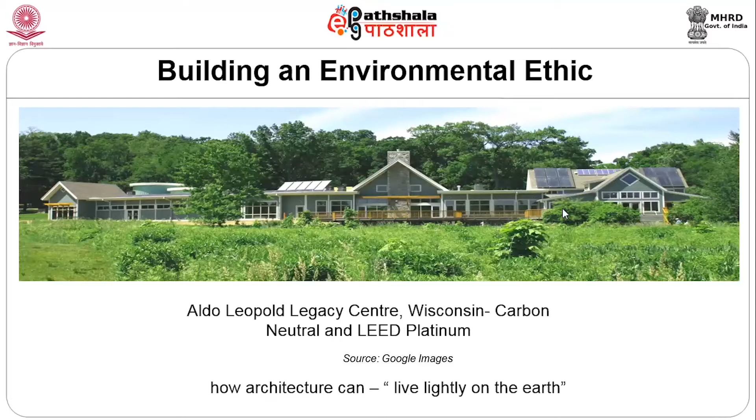When you look at the site and the correlation to the building, it is very much in cohesion, it is very much in harmony. It is not a glaring glass facade and a metal structure. The materials and the environment and the site all go hand in hand. And that is the beginning of developing an environmental ethic. So what is environmental design?

What has happened in today's context is something that is emergent: corporate architecture. According to Lewis Mumford, the modern architect has produced the most flagrantly uneconomic and uncomfortable buildings which can be inhabited only with the aid of the most expensive devices of heating as well as refrigeration. The irrationality of the system of construction is visible today in every city from New York to San Francisco. Glass sheath buildings without any contact with fresh air, sunlight or view.

This happened in the West, in the United States and Europe, much earlier than it has struck eastern countries like India. What exactly has happened is a particular frame has been created where a building has to fit in. We have forgotten the importance of site, climate and other such factors that go into architecture. We have related posh and expensive living as the primary way to live. We have forgotten that there is something called climate responsive architecture, there is something called sustainable design.

Now what has come to the current scenario is we have created a problem over the past few decades and now we are striving hard to find a solution. Till now, India and other countries of the East have always aped the West. Let it be urban renewal or any form of architecture, we have always tried to see what they have done and follow in their footsteps.

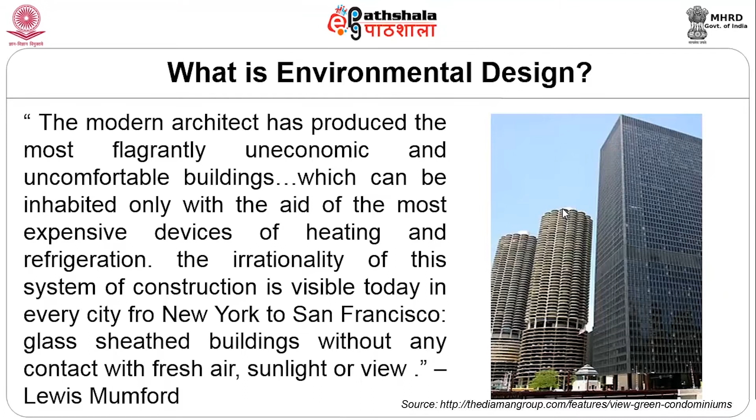And now when sustainability is the most talked about topic in countries like the United States and Europe, this is also the right time to actually look at them and decide that certain things that we have taken from them are not apt for our country, our climate and our energy scenario. If you look at environmentally sensitive design, it actually has to be harmonious. It has to be responsive to climate.

We have to make sure that our consumption of energy in terms of heating or cooling the building is minimal or negligible for that matter. So let's try using natural air, natural light, natural ventilation, natural solar characteristics so that we can minimize the consumption of energy, and the building seems to be a part of the site rather than something that's been forced upon it. So we have to make sure our dependency on non-renewable resources is very, very minimal.

And the non-renewable resources should also be considered for, and made sure that the building is giving back at the rate it is consuming. So basically, sustainable building design looks to live lightly on the earth, so there will be quality as well as resources for the generations to come.

The project over here we have is the Eden Project in the United Kingdom, where it's incorporating nature as well as innovative architectural design. This again was a very controversial topic because in spite of it being a passive design in terms of environmental design, where the energy consumption was nil and what it took from the earth was very less, the material that was used was not considered to be the primary utility because it changed the value of the building tremendously, and this building definitely does not look as if it belongs to this site. It does look as if it's been thrust upon it.

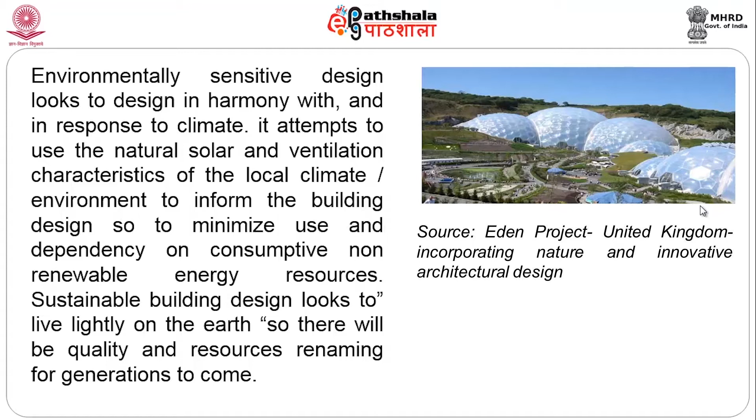So here again there are two different ways of thought. Can a design be completely passively designed with less energy consumption? At the same time, can it be flagrantly designed in terms of design? So can climate responsive architecture buildings not have a cool factor? Is that true? Not really, and the Eden Project is one such example where the architect did play around with spaces, materials and all of that, but still it proved to be a good example of a carbon neutral building.

The ethic behind sustainability. Now coming to an example within our very own country, this is the Sembra Valley in Kodaikanal. This is a resort that was developed, and this place is created, submerged and surrounded by nature, like you can see over here. The rooms are pretty much in context with the site. They are not thrust upon it, and any cutting along the hills happened in cohesion with the trees that were there. And it was very much decided that any trees that were cut down during construction were accounted for and replaced as an afforestation program side by side.

So sustainable building actually is not a new genre of architecture. Like how we have modernistic architecture, the Art Deco movement, all those are styles of architecture. But sustainable building is a basic requirement of architecture. Like how we have light, ventilation, and basic materials that are required to build a building, sustainable design is one such basic requirement that needs to be considered. It is not an option for an architect to follow, but it is a requirement for every architect to follow.

So our primary goal is to lessen the harm any poorly designed building can cause by using the best of ancient building approaches, but with a logical combination with the new technological advances. I think this is the best time to learn from history. If you look at any of our old historic buildings, all of them are considered the best examples of climate responsive architecture. How many palaces and forts have been there for centuries? They don't require fans or air conditioning, and still they are very good places to live in.

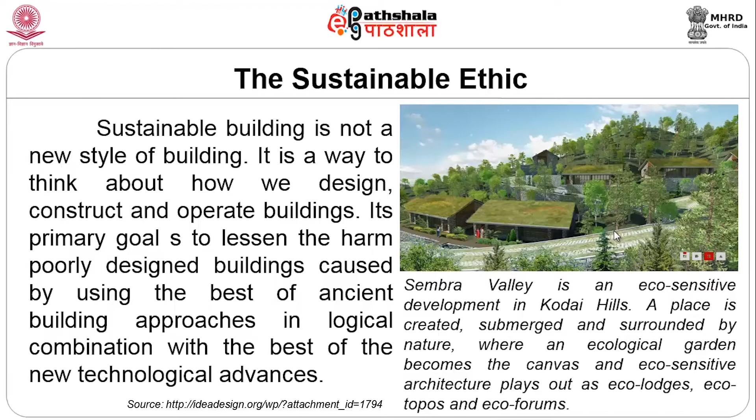This is another example of the Sembra Valley part. This is another portion of it where you can see that you do have elements of the modern era. You have the traditional paving. You do not want to have a completely muddy route and all of that. But the way it has been done, the lights are completely solar powered. It takes power throughout the day from the sunlight, and once the sun sets, it automatically triggers on. But the problem with this is it's not completely foolproof. On days that are very cloudy or rainy, it does need an external boost of energy or electricity.

But we need to have a fallback plan. A plan B is sufficient enough for the current scenario we are in. Rather than taking energy on all days when the sun is capable of giving us energy, on the certain days when it is gloomy or cloudy, we can step in and substantiate for that. But the main ultimate goal is to make offices, homes, as well as entire regions that are net producers of energy, clean water, air, healthy human life as well as biological communities. So that is the root of all ethics of sustainability.

We need to ensure these basic necessities, which have now gradually become luxuries, are restored. We actually have people selling air from New Zealand and Canada to parts of Beijing and Shanghai because the air has become so polluted.

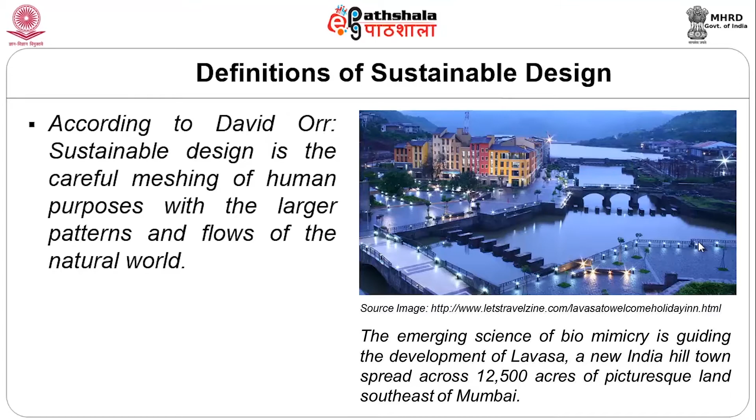If you look at Lavasa, the credentials are right about here. 70% of previously deforested land is going to be restored with detailed landscaping, reforestation and slope greening. So for any project in the hill stations, that is one of the primary goals of sustainable design. Any tree or any plant or group of plants that are removed, first, the point to be noted is they are not indigenous species. If they are indigenous species, they are best avoided to be removed. If at all it has to be removed, they are replanted or transplanted, or a new percentage of greenery replaces the ones that have to be removed.

There is a 30% reduction in carbon emissions. There is a 65% reduction in potable water consumption and a 95% reduction of waste sent to landfill. So all of these, if it happens by 2020, will set a great example within our own country that it's possible to actually have a town with a great number of inhabitants and have a sustainable way of life.

So here in Lavasa, if you see, the biologists have been actively involved because biomimicry was one of the main things they wanted to incorporate in this design, where living creatures and plants of the moist deciduous ecosystem were to provide guidance and the models for establishing locally attuned design strategies that actually respond to the challenges of the local biome.

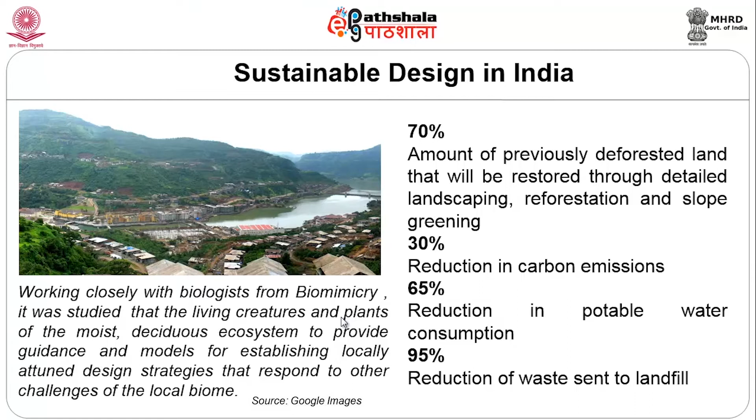So what happens over here is Lavasa's heritage was stuck to Lavasa. The site of Lavasa was not compared to something that was there in Europe or the United States. So the indigenous species, all of that was compared with respect to Lavasa, and a design proposal for this particular site emerged not relating to any other site elsewhere. So it is completely indigenous species, local species, and a very suitable example for us to follow.

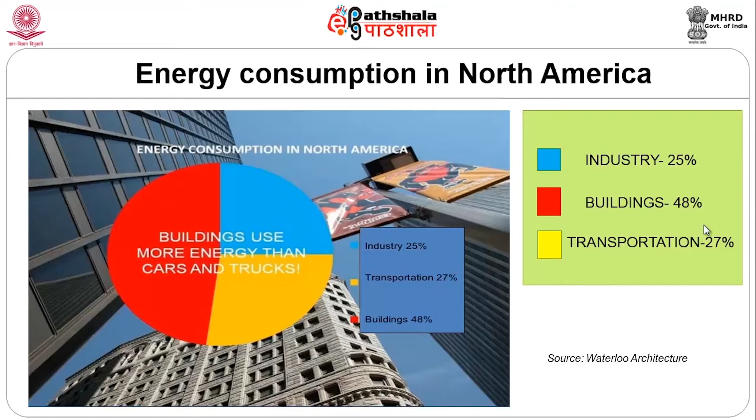If you look at the energy consumption in North America, the buildings consume a whopping 48% as compared to an industrial consumption of only 25% and transportation a mere 27%. When I say buildings consume 48%, it is a huge percentage because of heating, cooling, elevators, because when you have skyscrapers, you have high-speed elevators and normal speed elevators. All of these services play a huge role, and all of these services require a huge chunk of energy, and therefore the whopping 48%.

Now if you come to India, within India, buildings are not far behind. We are at close to 30% of energy consumption by buildings. If you look at a completely developed country like North America and compare it to India, I think we are way ahead of where we should be, because we have had a rapid rate of growth in the recent past, and this has resulted in a huge energy deficit.

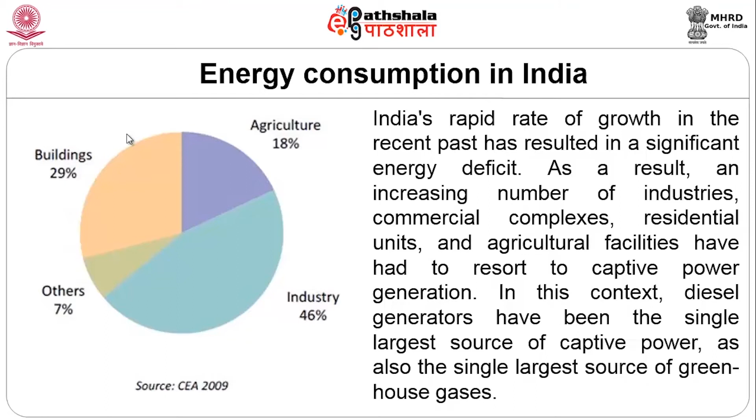Even the so-called sustainable green resorts that are emerging across all these hill stations are far away from all electricity grids, and they are completely dependent on diesel generators. And because they use diesel generators, the green quotient of the resort drops by a huge percentage. Just by using adobe or mud bricks or exposed brickwork, it doesn't mean the building is green. What kind of energy does it consume? What kind of energy does it give back to the earth is what decides how green a building is.

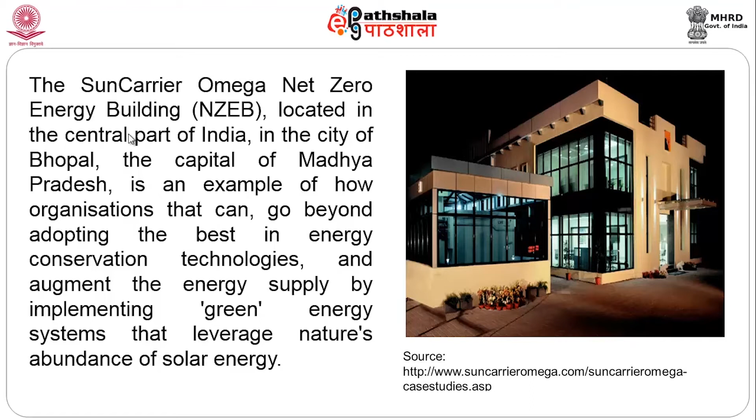This is an example of a net zero energy building which is located in Bhopal in Madhya Pradesh. Organizations can actually go beyond the role by adopting the best in energy conservation technologies. They can even augment energy supply by implementing these green energy systems and leverage nature's abundance of solar energy. A net zero energy building is highly energy efficient and produces at least as much energy over the course of a year as it consumes. So that is the huge factor.

So in a year, if a building is consuming say X megawatts and it's able to replenish that within the following year, imagine what the energy capacity of our country would be. So this is something we need to look at. Though the initial investment is quite high, the returns are much higher and greater.

So if you look at the demand side renewable building technologies, SunCarrier Omega is one such company, which includes daylighting, insulation, occupancy monitoring. Occupancy monitoring is when a room or a building has a capacity of 20, the air conditioning and all the energy that building consumes will automatically adjust for the requirement of 20 people. Say there's an event and the capacity increases to 150 or 200, automatically that would kick in. So there is better efficiency in using the machinery, and the comfort level is also maintained. High efficiency HVAC, natural ventilation, water harvesting and evaporative cooling.

We do have to note that Bhopal is one of the hottest cities in the country, and if they can do it, then many other cities across the country can do it as well. So we need to create grid independent habitats. Grid independent habitats are essentially buildings or gatherings of buildings that are no longer dependent on the electricity grid. They create their own power and they are able to distribute it amongst themselves.

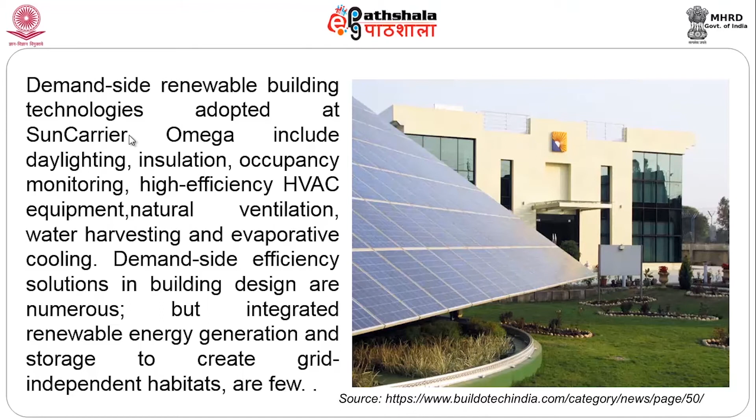So pollution is an act of design. Anything man designs is basically keeping a date of expiry in mind. Even our buildings these days are keeping a date of expiry. If it's a concrete structure, if it's an apartment, we give it 75 years. If it's something else, 25 years, 50 years. So we are the only people that come up with a date of expiry even before something is in the manufacturing process. So even this building was basically designed to be thrown out. You can see the energy waste and energy consumption when we built this building, during demolition and replacing, and the huge energy resources that it's actually consuming.

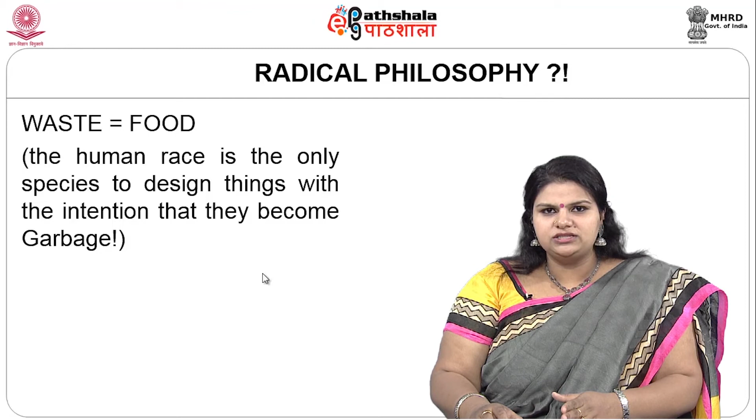So basically, we are the only race that consumes things without any regard for where it actually goes. And even if we throw something in the garbage, we don't know where it goes from our garbage can. We don't think of the landfill. Right from food to building materials, everything is the same. So shall we go about designing for disassembly, so that even buildings can be taken apart or repaired or reutilized, and we can dismantle them and keep them if they are no longer in use? Is that possible if we think of prefabricating certain elements of the building? Reuse actually means less energy than recycling.

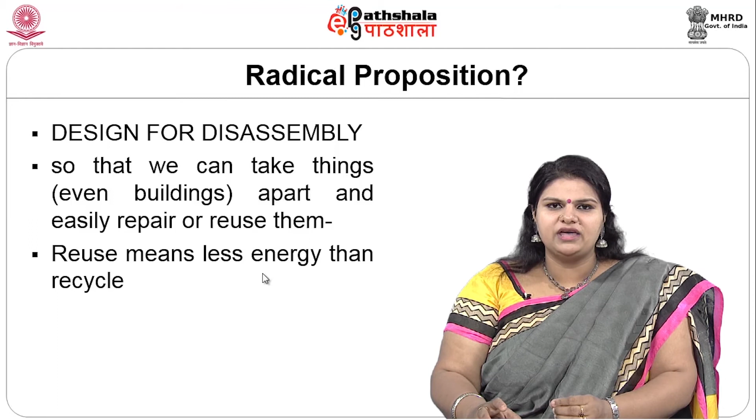Recycling also requires a lot of energy because we are first bringing it back to scrap and then recreating something out of that scrap. So there is a lot of energy used even in that process. But if you're going to reuse something with a small retrofit here and there, it's a much better option. This is something that we really need to face.

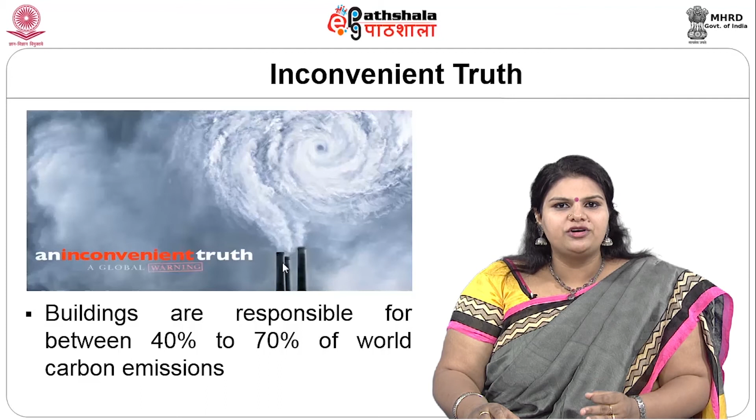Buildings are responsible for around 40 to 70% of world carbon emissions, and that's a very high percentage because buildings are something that we can never do away with, and as architects, buildings are our bread and butter. If we cannot design a building, what is it that we'll be doing? But as architects, it is our responsibility to design buildings such that they do not detract from this fact, but actually add on and say that our building is contributing to a greener society and a greener place.

So what are the basic problems that we would face? No power, hot weather in summer or cooler temperatures in monsoon and winter. If you look at India as such, we have regions that are majorly hot and humid or hot and dry. North and certain parts of the south where hill stations are, we have cooler temperatures and a temperate climate where there's a drop in temperature between the day and night time. So we are dependent on electricity, heating and air conditioning.

So how exactly do these environments work? How do these built systems and buildings work? And in what way do the buildings that we are currently designing not work with respect to the environment? Now, even if you go to all of these eco resorts, one of the first options they give is air-conditioned rooms and non-air-conditioned rooms. It could be a place like Ooty, Kodaikanal, like we saw in Sembra Valley, but there's still an air conditioning requirement, because to get a star rating, air conditioning is compulsory.

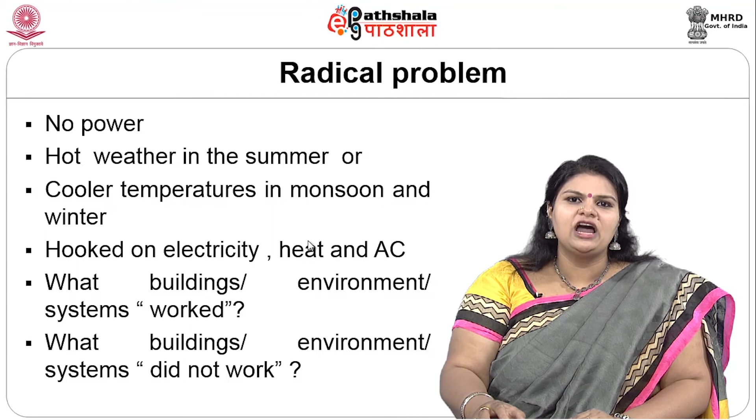So we need to rethink a lot of these facts and scenarios, what decides a rating of a hotel, what decides the comfort level of a hotel. Our comfort level is not dependent on whether the air conditioner is running, but it should be dependent on how well the building is responding to the climate outside and how well it's protecting you from it.

So even as architects and as professionals who deal with design day in and day out, this is not something we should go for. Sustainability is a huge factor, yes, but even as a design factor, what is so great about these buildings? They are just replicas of the buildings that were built when there were technological breakthroughs like elevators, materials like steel and glass. So they wanted to build these buildings to showcase these materials. Now I think we have come away from that phase and fad, and we need to face up to the truth and design for the current scenario.

We need to really awaken to certain facts. Grid and energy dependent buildings and systems really do not work. We need to have operable windows, not fixed windows and glazing. Natural ventilation is any day great. Natural shading devices are better. Sunlight definitely helps, where we can utilize the energy from the sun as well as daylighting. Wherever required, we can daylight the spaces and not use artificial light. Walkable neighborhoods have definitely worked, where we can reduce the consumption of fuel, with bicycles and walking rather than taking a motorized vehicle for even the shortest distance.

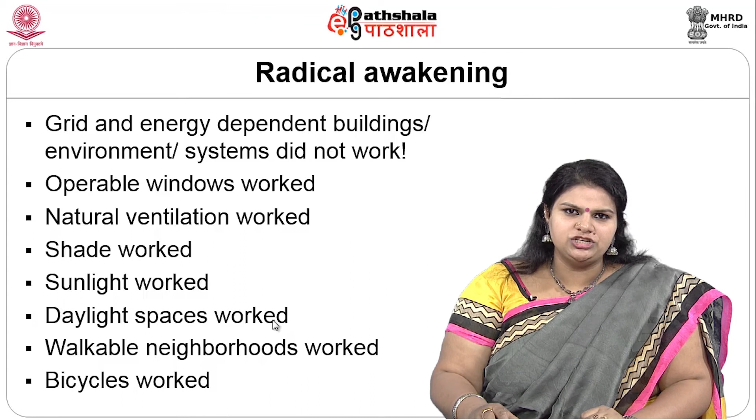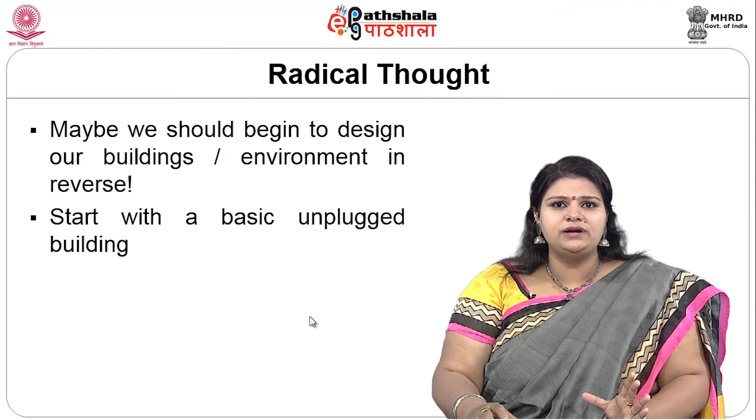We should actually begin to design our buildings and environment in reverse, which means first unplug the building, think of the environment, and then start designing the building, rather than having a great design of a building and just thrusting it on wherever our site comes up. First, we will only keep the sun in mind as the primary source, cool only using natural devices like wind and shade, and transferring this with things like stack effect.

Use only daylight during the day, and architecture should come first, then come the mechanical systems. Now, when any architect gets a design project, his element is very small. Then he gives it to the HVAC guy, then he gives it to the fire department. So there are a lot of other inputs.

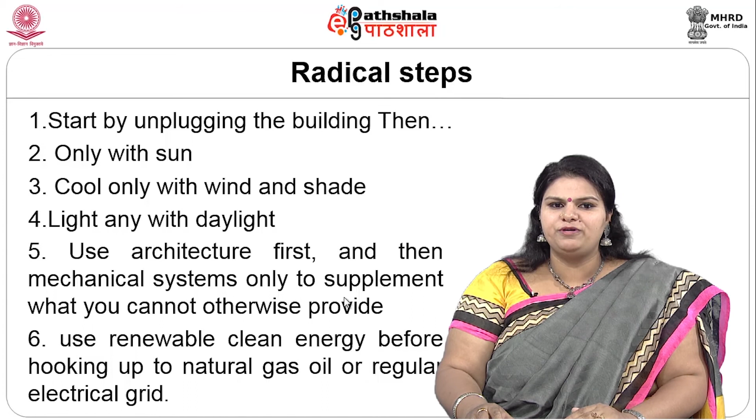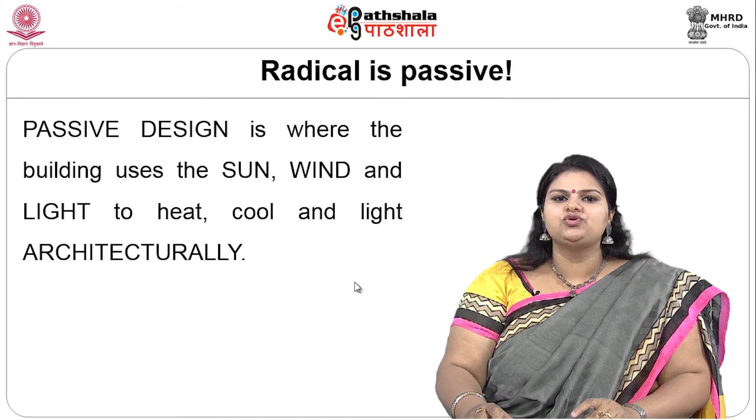So let's reduce the mechanical systems to the maximum and make sure there's renewable energy before hooking up to natural gas or the regular electrical grid. So passive design is where a building uses the sun, wind and light to heat, cool and light architecturally.

We need to make a radical realization that the current lifestyle that we have adopted from the West with respect to our consumption of energy or any of the natural resources is definitely not a sustainable way of life. Developing countries like ours, with much higher population, are striving to ape the North American lifestyle, including architecture, which again is not a very good solution.

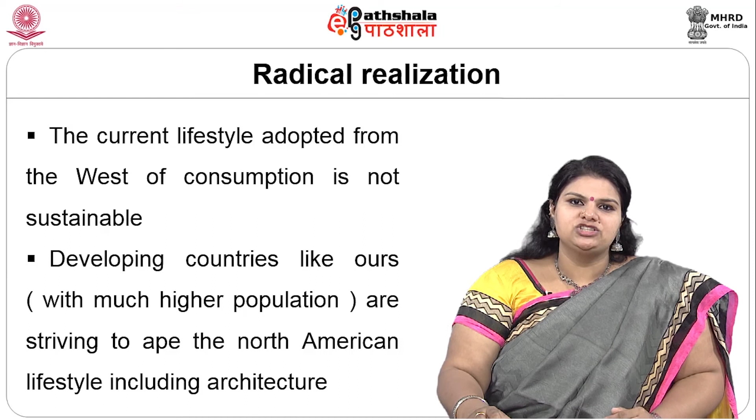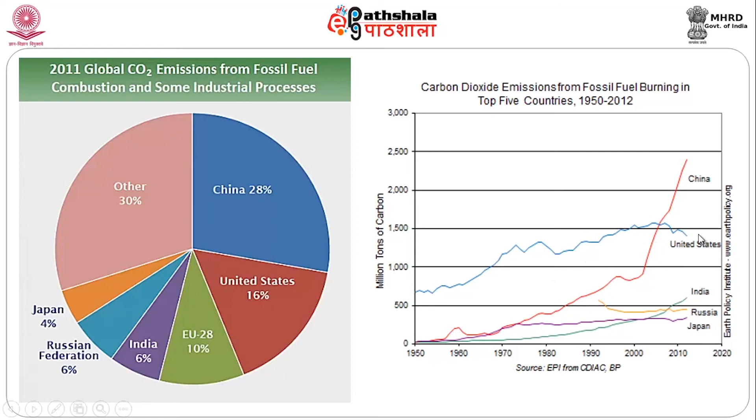So if you look at the million tons of carbon consumption from 1950 to 2012, India has risen drastically from the year 2000 to the current scenario. China from the year 2000 to the current scenario has been a very steep climb. The United States has always been on the higher end, but it has not suddenly increased at any point of time. So this is something we need to take into consideration.

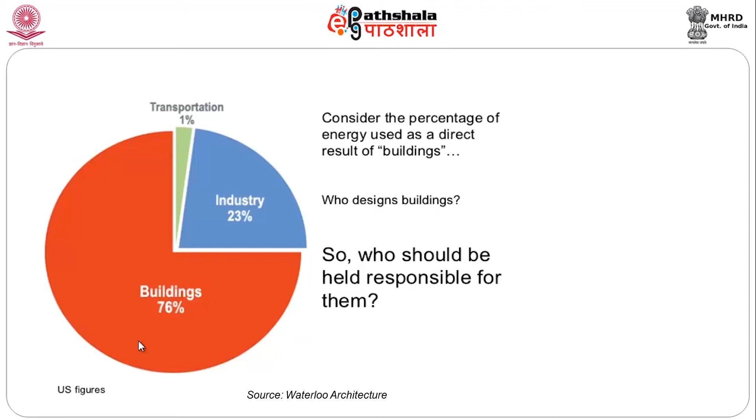And here again, this is in the United States, of course, the buildings consume a whopping 76%. So when buildings are consuming so much energy, who has to be held responsible? It is the architects, because the architects are the ones who are designing the buildings that are proving to be energy guzzlers. They consume energy constantly throughout the day as well as the night.

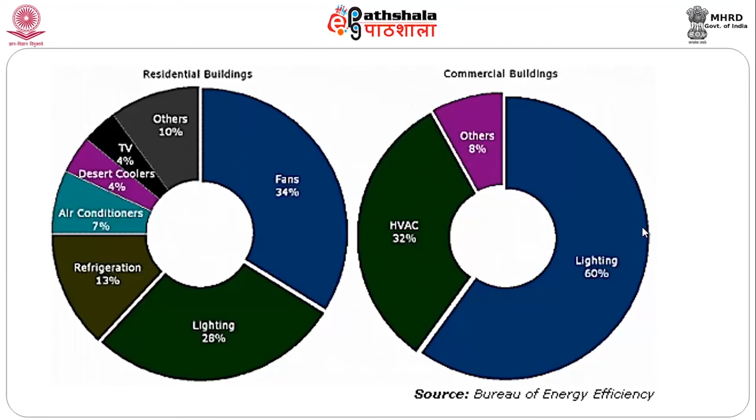Most offices run only during the day. Assuming there is a night shift, it's only then that electricity consumption for lights should be there. So if the building is well designed and well ventilated, this scenario should drastically change. So let's look at the checklist that we have.

We definitely need to treat the earth well. It is not our birthright to consume whatever we earn. Rather, it is our duty to make sure that this earth is given to our children and future generations in an intact manner. A sustainable building should make appropriate use of the land. It needs to protect agricultural, cultural, and archaeological resources. It has to be a place where people are happy to live in. It needs to be economical to build as well as operate.

So how do we go about answering this challenge? As architects, we need to figure out how to solve this problem by designing buildings more sustainably and holistically, and also use less and less fossil-based fuels, as we will not be in a situation in the future where we can completely rely on them.

So we have to make sure that we are more self-reliant and are using resources from sun, wind and water, and when I say water I mean for electricity, because we need to have a renewable source of electricity rather than coal and other fossil fuels. For us to have a sustainable life and sustainable living, it starts from the building, but it ends with the way the user is going to use that building.